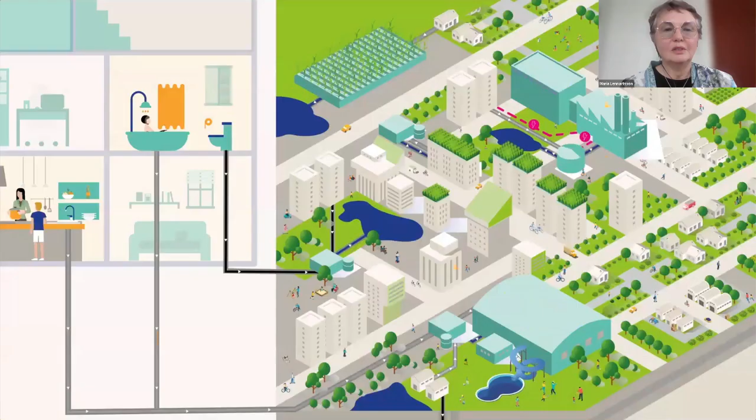The purpose of the Anchor project is to have this goal: let's fuel the transition towards water-wise neighborhoods. And it is trying out source separating wastewater systems to retrieve the resources from wastewater in the same manner that we do in separating solid waste. So toilet water for the purpose of collecting biogas and nutrients, grey water for the purpose...

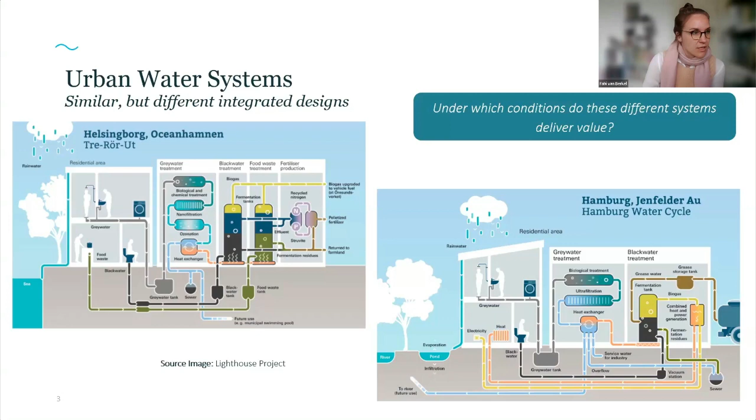This is also very much related to nexus thinking, in the sense that we're connecting different flows towards each other, using different types of resources, and looking at how these things can be combined and have different value for other sectors. But it's important that we also implement these systems within the urban context, looking at this from both angles.

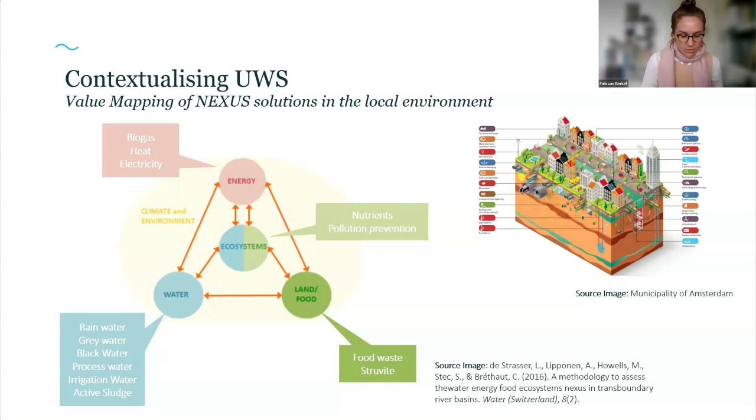This is quite a challenging way of looking at it, but I found literature on industrial symbiosis, which can be viewed from two different angles related to different backgrounds. From a circular economy perspective, it's seen as a business model archetype based on sharing infrastructures and byproducts to improve resource efficiency and create value from waste. From an industrial ecology perspective, it's more focused on the socio-technical process based on cooperative interaction of separate businesses.

So the importance is that every different stakeholder has a different driver or motivation to engage in such a development. I think it's important and interesting to get those thoughts and driving mechanisms out of the urban development or wastewater systems that we're studying.

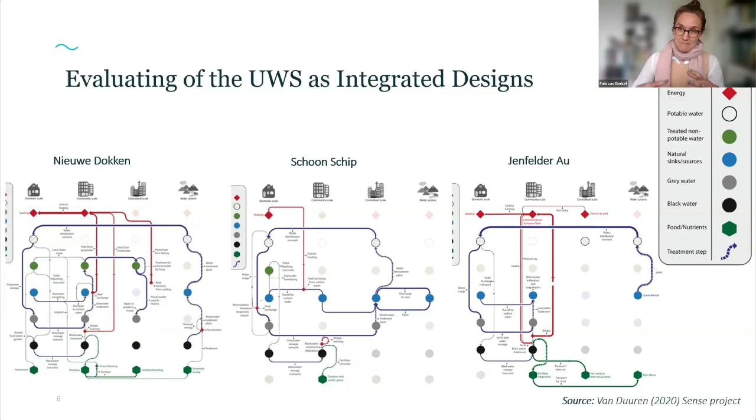What you can see here is that integrated systems have different connections made, different flows, different resources used, different types of technological systems, and they add value to different systems and to different stakeholders. But seen holistically, they're all together there.

What I'm going to do in the research is try to have this helicopter perspective, which is possible because the systems have been researched quite well already, so there's enough data and material to base my analysis on. I'm going to look at the development of the entire urban developments that have been made, and the starting conditions - in what way people have actual value propositions in the beginning, in what way they're engaging with these developments, and what are the motivations behind it.

But also the events - like in some situations a subsidy came across, which meant they were able to take another step in the development process. Based on that, we can look at the outcomes of what actual values have been created in the development.

I think it's also very relevant to learn, in a later phase, what's actually the motivations behind the designs of the system in this specific context. If we can learn from these kinds of things, it will be valuable to see how we can scale up some of these systems in a different context, under different circumstances.

I found a very helpful framework that can help me do this analysis, because after that we also need to change our perspective a bit on value dynamics, because value created in these types of systems is not something fixed. Of course you set an ambition or a goal, but in practice, when developing your system, there are many different factors involved in the way you can actually create value.

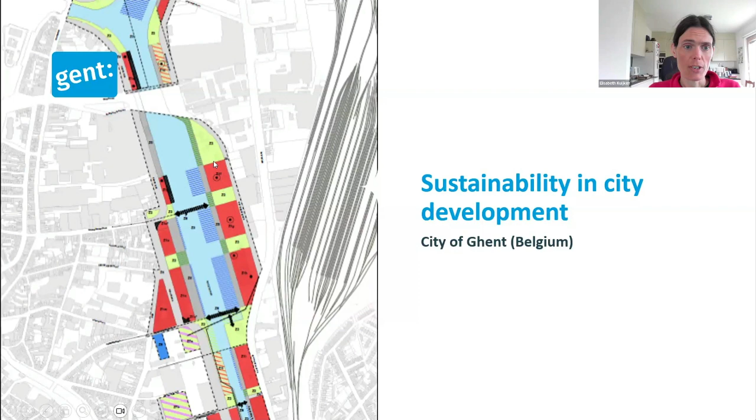So the general layout is here, and the Nieuwe Dokken is this part here on the right to the east of the water. I don't know if you see my mouse indicator. So those 3 red areas are the residential areas, and here are the green spaces.

There was soil pollution on the terrain which needed remediation, but that was also an opportunity to achieve a better situation environmentally. A brownfield agreement was made as a framework for cooperation between the public stakeholders involved, not only the city of Ghent, but also the regional roads authority, the water management authority, and so on.

A very important point for this project was that we, as a city of Ghent, or the city development company, were the owner of the terrain. And the people living nearby got to know the site through some temporary local initiatives on the site.

Then it was decided that we wanted a private partner for the redevelopment of the site. So the city development company did a 2-step procedure in which there was first a selection and then the real tender documents were sent. So at first we had some 13 candidates, then it was narrowed down to 3.

In the tender, of course, there was the financial criterion, but also quality criteria in which sustainability played quite an important role. Eventually, a public-private partnership agreement was signed in 2014, and the project is now partly in use, partly still being built.

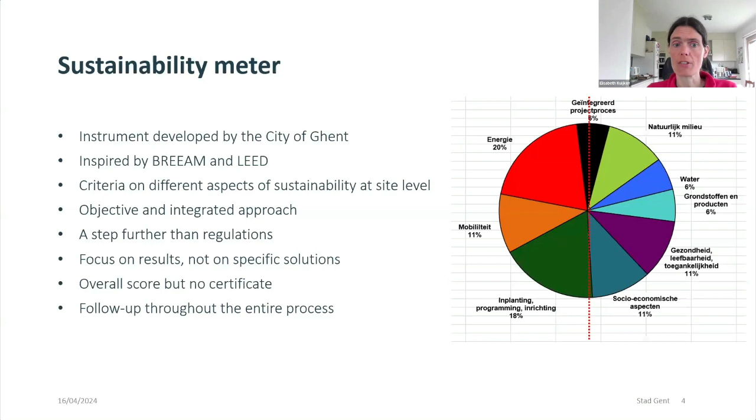Meanwhile, our instrument has been taken over by the Flemish government, who has made an update and an improved version.

So what did we do specifically for the Nieuwe Dokken? We first did our homework at the city of Ghent. We made an analysis of the site qualities and previous decisions influencing the sites, and we saw that some criteria were already fulfilled, and on the other hand, some could not be fulfilled.

We decided that an overall score of at least 70% should be achieved by the private partner, preferably 80%, so we wrote that into the tender.

We also added some extra requirements on energy performance. The background to that is that at the time we were drafting our first climate plan as a city of Ghent, so energy was quite in the center of the focus at the time.

We did not include extra requirements on wastewater or on water in general, not beyond the principal level. I think today that would be different.

We also had some quick scan analysis made on heat pumps and on energy from wastewater based on some exemplary projects in the Netherlands, for example. And we added those documents to the tender just as an inspiration.

We got lucky and had 3 ambitious candidates in the tender. Eventually we chose one with a very high score on the sustainability meter, exceeding our expectations.

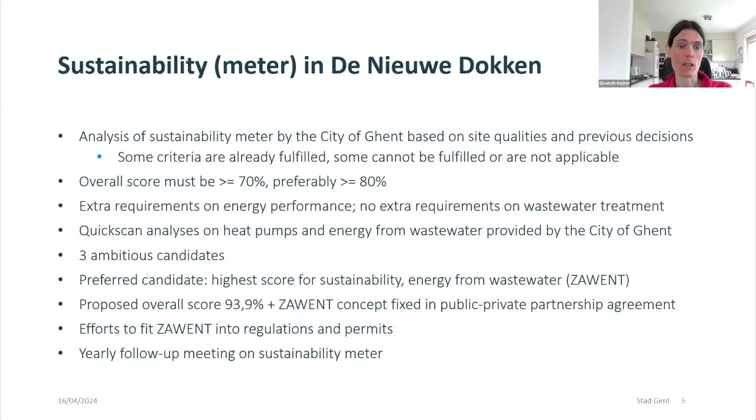Since then, we follow up every year on the sustainability meter. We discuss whether this score can still be achieved. Many times there is need for discussion on the interpretation of some criteria and so on. We've had quite some efforts to fit ZAWENT into all necessary regulations and permits, as this is really a non-standard system in many ways. But in the end, it's working now.

Just to finish, some lessons learned. I think very important in this project was the public ownership of the terrain, which really allowed us as a city of Ghent to write requirements or ambitions into the tender, whereas in a purely private project you can't do that.

The sustainability meter is being used in just a few quite large projects, like the Nieuwe Dokken. We feel that it's less useful in smaller projects. It's just too much of a workload, and there are fewer degrees of freedom. It's just better to include some specific sustainability criteria in the tender.

We are fine with the sustainability meter having no certification. It's just a very good base for discussion on sustainability.

A complex factor we noticed is the long duration of those projects. The criteria in the sustainability meter are fixed, but regulations change, insights change, stakeholders change, and many times it's necessary to find a balance between holding on to the key ambitions versus a flexible interpretation of criteria.

Also on innovation, a balance has to be found, and I don't feel that we have found the ideal balance yet. On the one hand, we want to encourage innovation. On the other hand, we want to ensure long-term qualities, and certain city departments really look at trusted solutions, not innovative solutions, to achieve that. So that's an ongoing process to find that balance.

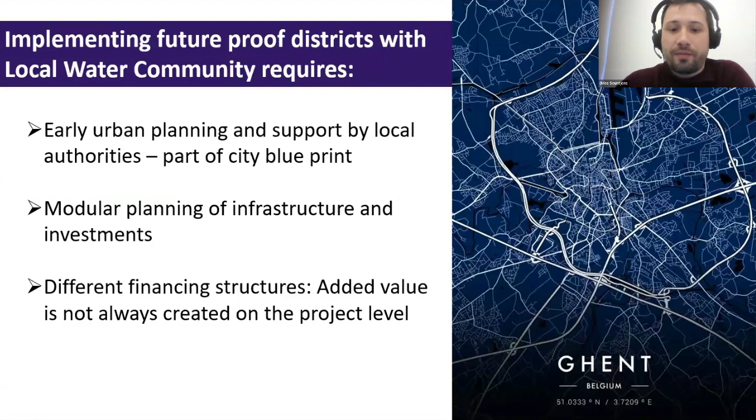So it's also interesting to look into how to finance these projects so that the multiple value benefits created by the project, as Fabi was talking about, can in some way also come back to the project level. So these are my reflections, and if there are any questions I'm happy to answer them later.

Okay, thank you. Before we go into the questions, Elizabeth will present a study that we made here in Stockholm. So the floor is yours, Elizabeth.

Thank you so much. Can you see the screen? I think, yeah. One reflection back to Dries and the other Elizabeth: maybe not everyone in the audience knows what the new Loudden looks like, so maybe after I'm done you could show quickly what it looks like, because it's so nice. Anyways...

As Maria said, my name is Elisabeth Kvarnström, and I'm going to present the cost-benefit analysis for different wastewater systems in a new urban area in Stockholm. It's not me who did this job, it was two very competent economists, Åsa Sotekulva-Svanberg and Henrik Nordskjell, who made this study. Neither of them could unfortunately participate today, so you'll have to put up with me instead. The presentation is based on a report, which is available, and I'll provide the link afterwards.

Just a few words about what a cost-benefit analysis is. I'm not an economist myself, so sorry for explaining this and not knowing exactly what I'm doing. Anyways, it's a decision support tool to evaluate different infrastructure investments, and to look at what kind of benefits will this infrastructure investment provide to society in comparison to their costs.

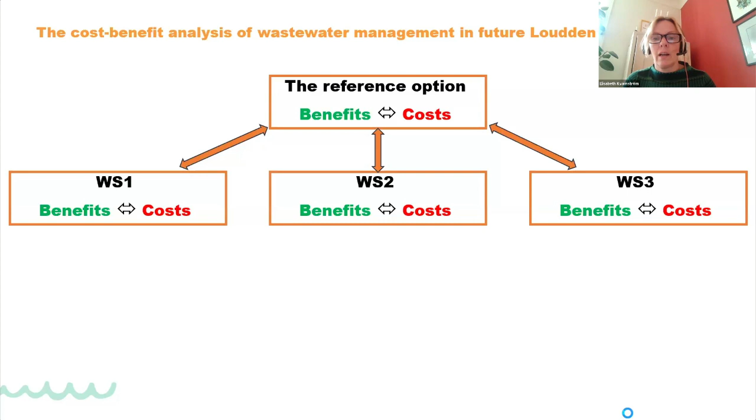And what one does in a cost-benefit analysis, you take the reference option and you look at the benefits and the costs for the reference option, and then you compare it to different alternatives. In this case, the economists looked at 3 different wastewater systems, which I'm going to explain in a little while. But this is essentially what the cost-benefit analysis is: you have a reference option and different alternatives, you look at the benefits and costs of each, and then you compare them with each other.

A few words on the systems. Here is first our reference alternative, and it's the existing wastewater treatment plant in Stockholm in 2020. For international audience, it's an advanced wastewater treatment plant with tertiary wastewater treatment, removing nitrogen and phosphorus.

The biogas produced from sludge is used for public transport in Stockholm. Sludge is reused to a relatively large degree, which means that we have a quite good recycling of phosphorus to farmland. So it's a very good wastewater treatment plant to begin with, the Henriksdal wastewater treatment plant. And this is our reference alternative.

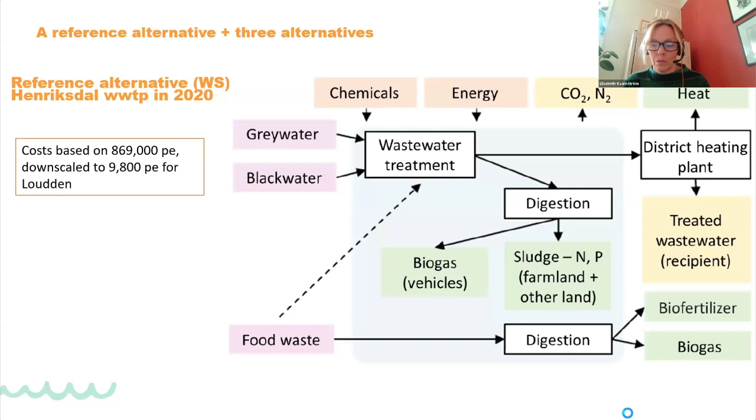And this is important to remember: the costs for the reference alternative are based on 869,000 PE, which is the connected PE today. And then when we're looking at the costs for Loudden for the reference alternative, those costs are downscaled to 9,800 PE, which means that the costs for the reference alternative are benefiting from the economies of scale, from about 900,000 down to 10,000. So it's important to remember.

WS1 is the first future alternative they were comparing with, and that is like the reference option, but with the addition of membrane bioreactors to both reduce the nitrogen and phosphorus in the effluent, but also to increase the capacity of the wastewater treatment plant. So this redevelopment is ongoing right now in Stockholm, happening as we speak, basically.

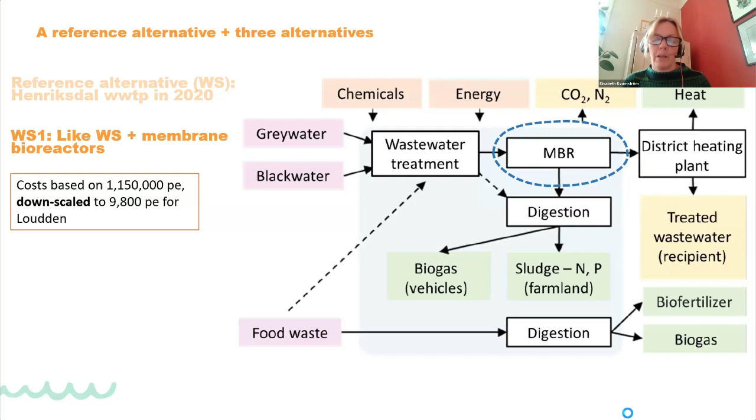And once again, the costs for WS1 are based on 1.15 million PE, and then the cost for this big number is downscaled to the smaller number for Loudden. So once again, the costs for WS1 are benefiting from economies of scale.

WS2 is like WS1 with a membrane reactor, and then we imagined a future wastewater treatment plant, a Rolls-Royce you could say, where we add micropollutant treatment and we add sludge treatment and reject water treatment, so we can produce from this treatment plant a cleaner nitrogen and cleaner phosphorus for further processing.

And in this case, there is no such treatment plant in Sweden, so we couldn't base the costs on actual costs, but still, it was based on 1.15 million PE, whatever costs were available, and then downscaled to 9,800 people.

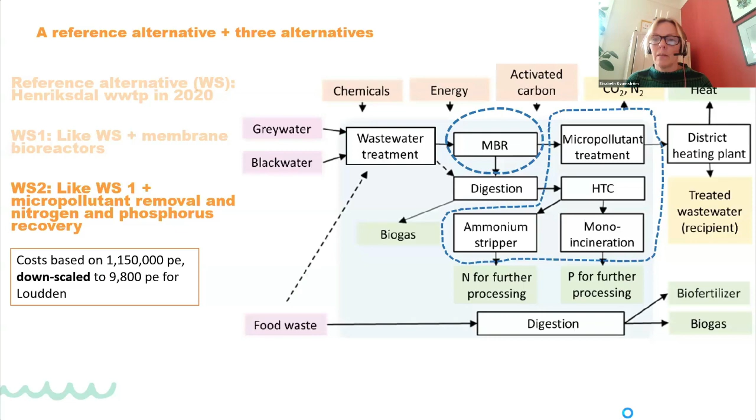So all of these, WS1 and WS2, are based on innovation and development in end of pipe at the wastewater treatment plant. And WS3 is a completely different system. It's a source separating wastewater system with micropollutant removal and nitrogen and phosphorus recovery, where the different fractions, the grey water, is collected separately and treated separately all the way for water recycling, and the black water and the food waste in this case is collected separately for struvite precipitation and ammonium stripping as well.

So you get the clean N and P products out. So this is a completely different system.

In this case, the figures for the system were based on the existing recovery lab in Helsingborg, Rekolab, which is part of the bigger wastewater treatment plant there, and it's designed for 2,000 PE. So costs for 2,000 PE were upscaled to 9,800 PE for Loudden, which means we have the opposite here. It's not an economy of scale. It's the opposite. It's suffering from lack of economy of scale.

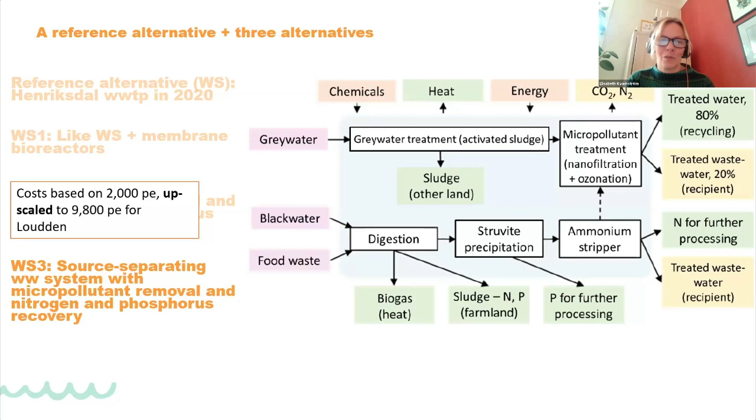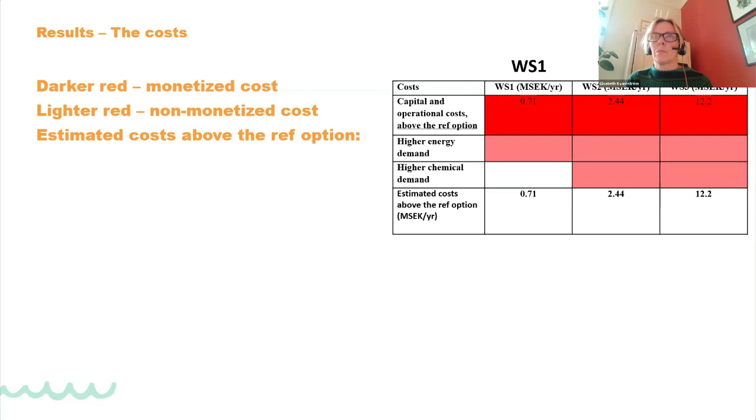Then we have the costs, same logic here: darker red is monetized costs, lighter red is non-monetized. These costs are estimated costs above the reference option. So the reference option has a cost, and that cost has been subtracted from these alternatives. That's how you present it.

The source separating alternative is by far the most expensive. WS1 costs above the reference option are 0.71 million krona per year. WS2 is 2.44 million krona per year. And WS3 is 12.2 million kronor per year, more costly than the reference option.

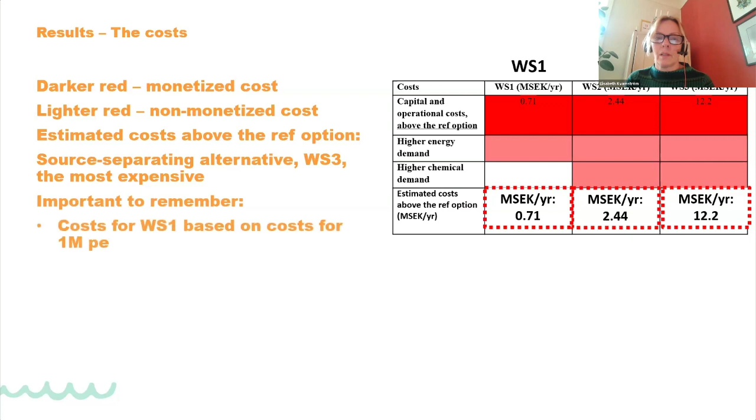However, you need to remember what I said in the beginning: costs for WS1 are based on costs for about 1 million PE, and costs for WS3 are based on costs for 2,000 PE. So there's this economy of scale that plays positively for WS1 and WS2.

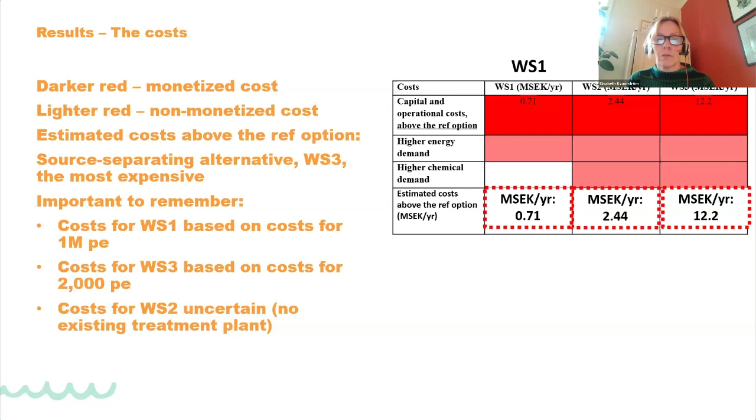Something to think about as well is that we did this study, or they did this study, in 2021, something like that. And since, as I said in the beginning, WS1 is actually under construction now, the costs for these membrane bioreactors have gone through the roof a bit, so this would look a bit different if we were to do this study today. And costs for WS2 are uncertain because we don't have an existing treatment plant to base the costs on.

However, the option that covers most costs is WS3, the source separating option. It covers 85% of its costs, whereas for WS1 it's 70%, and WS2 is 66% of the costs. Please remember, we have uncertainties in the cost estimates, we also have uncertainties in the benefits estimates, and there are also benefits that aren't monetized.

But anyways, the conclusion from the economists that did this study is actually that innovative systems like source separating wastewater systems can actually, because they provide so many more benefits to society, compete with end-of-pipe, more conventional investments from an economic perspective, in spite of higher investment costs.